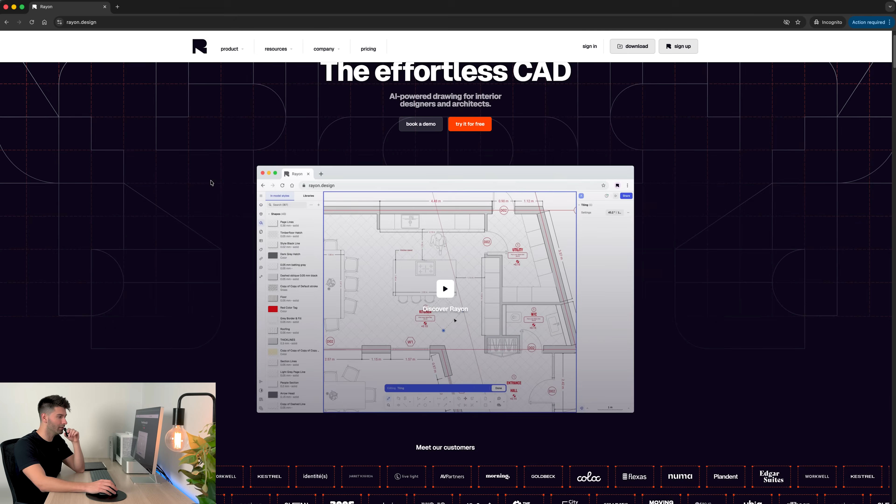Rayon, on the other hand, has been built for interior design from day dot. You can see straight away from their homepage that they're focusing on interior designers, floor plans, furniture layouts, interior graphics, schedules of FF&E, and so much more.

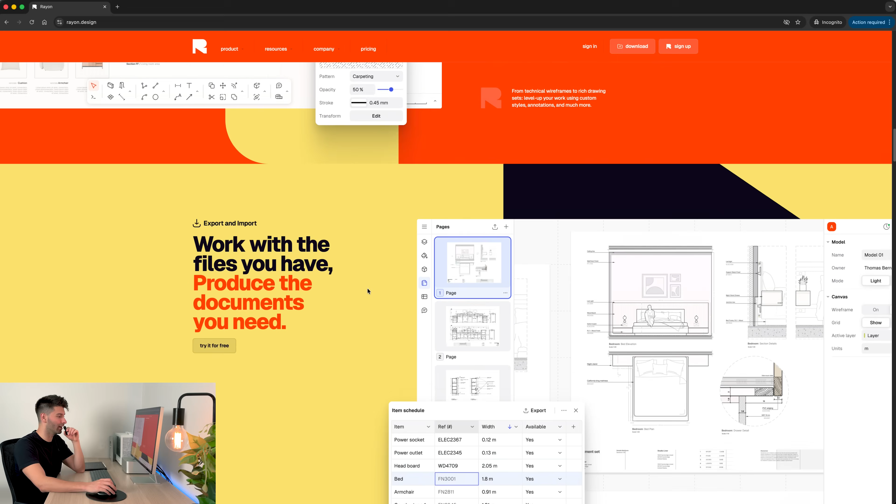If we just scroll through what they have to offer, it's a lot more colorful, vibrant, and more modern in 2026 compared to AutoCAD. We even have style and annotation in here, which I'll get to a little bit later on. Blocks and collaborative involvement. So straight away, it looks like this next generation software that we want to be excited about and learn more about.

And when we go across to pricing, you can see it's completely free. If you need a little bit more power, it's only $21 a month compared to the 200 plus for AutoCAD. So straight away from the two interfaces, we get the feeling that AutoCAD, you're telling the software what to do, how to do it, and drawing technically.

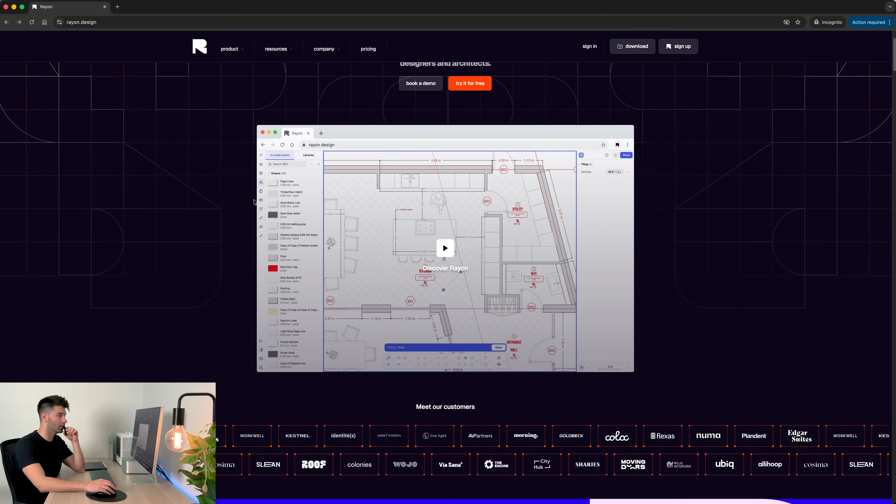Rayon, the software is letting you be creative. It's allowing the space to work for you and with you. Dive into a template and have a look. You can grab a copy of this template down below.

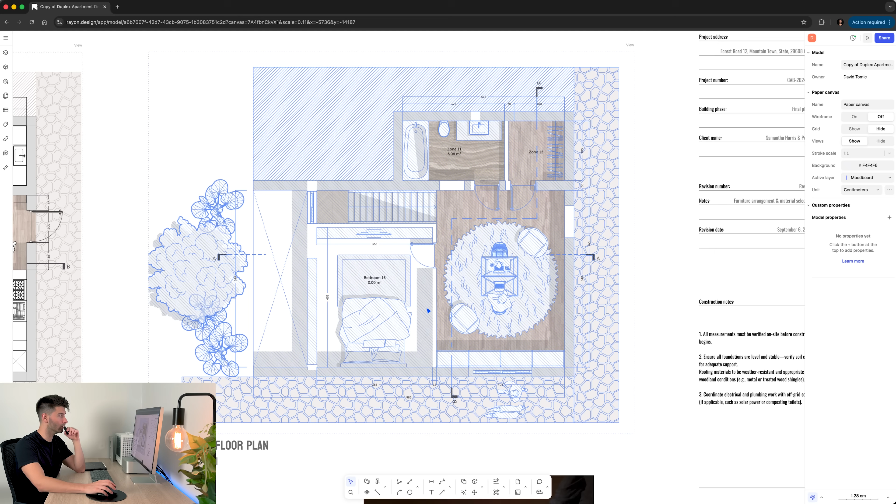This is an interior design for a duplex home renovation. You can see that we've got images, text, drawings, all in the one space. Even these floor plans for our furniture layouts are all done within Rayon. You don't have to take it to Canva or Photoshop or anything in between.

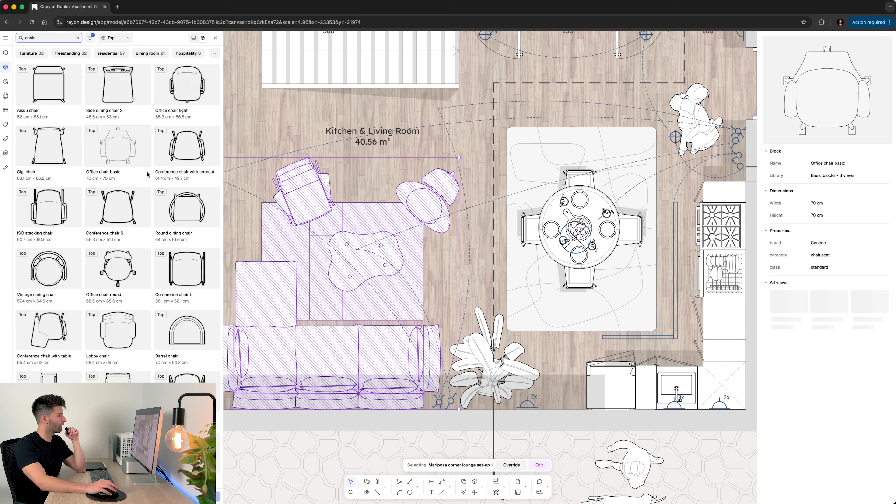In AutoCAD, we'd have a floor plan like this, but we'd be searching for blocks for weeks on end to try to find the perfect one, and we'd probably end up importing DWG anyway. In Rayon, blocks, find—let's just type in chair as an example—and you'll see I've got so many chairs to choose from, and they're full families too.

So if I click on this option, on the right-hand side, we'll have our top, front, and side view all available from that one same chair. If you can't find what you're looking for, you can use the AI panel either on the left-hand side to open the chat, or down the bottom, clicking the toolbar to generate a block from an image you found anywhere on the web.

Here you can see everything's grouped, so if I open up that group, I can adjust it in a matter of seconds—rotate, relocate, and update—and nothing breaks. It all works consistently time and time again. And like I previously said, this is all in Rayon.

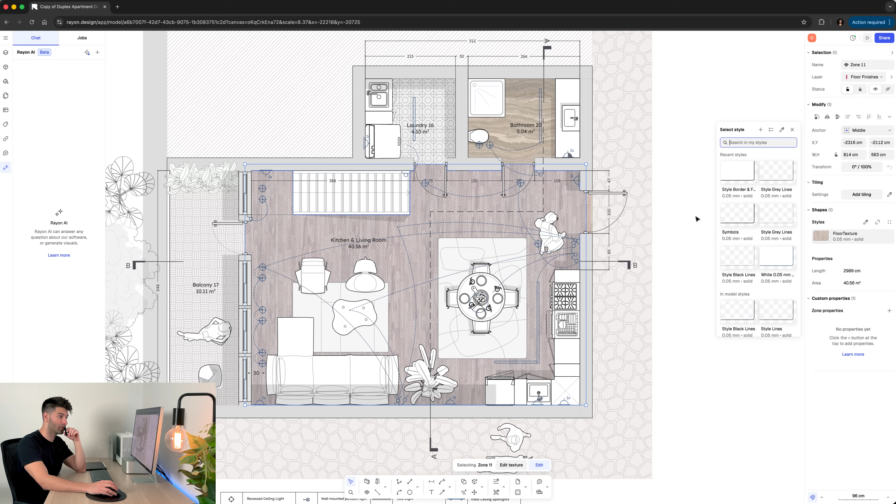So this behind is just a style, meaning it's a hatch that has a pretty picture attached to it. It doesn't slow your project down at all, and it lets you show exactly the design intent. If we wanted to change this, for example, we click on it once, and then we can click on styles and find something we like that's preset. If we don't want a preset, we can make it from scratch by clicking the little edit button.

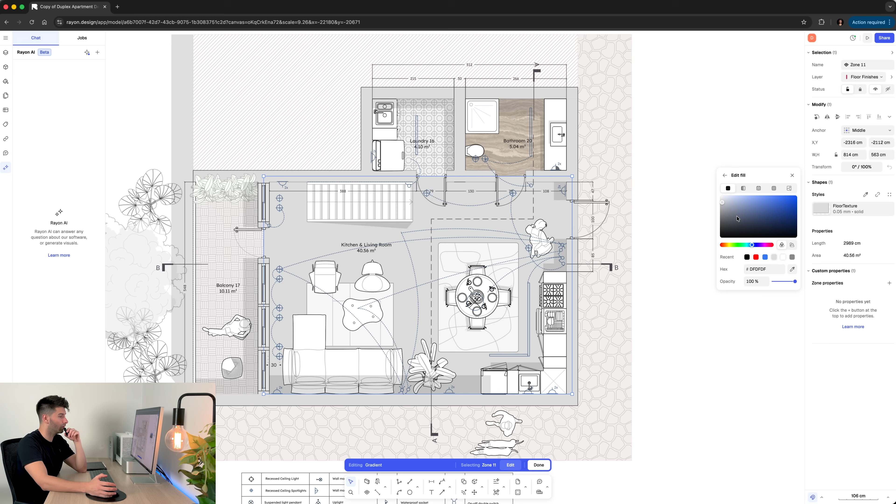Going into our textures, now we might want a hatch of tiles, we might want a custom image we've imported, or a fill that we've found, a gradient, or even just simply a color. All of these are super simple to change and adjust in Rayon. If you made a mistake, like always, Control Z, Command Z, depending on what software you're on, and it will just undo all those errors.

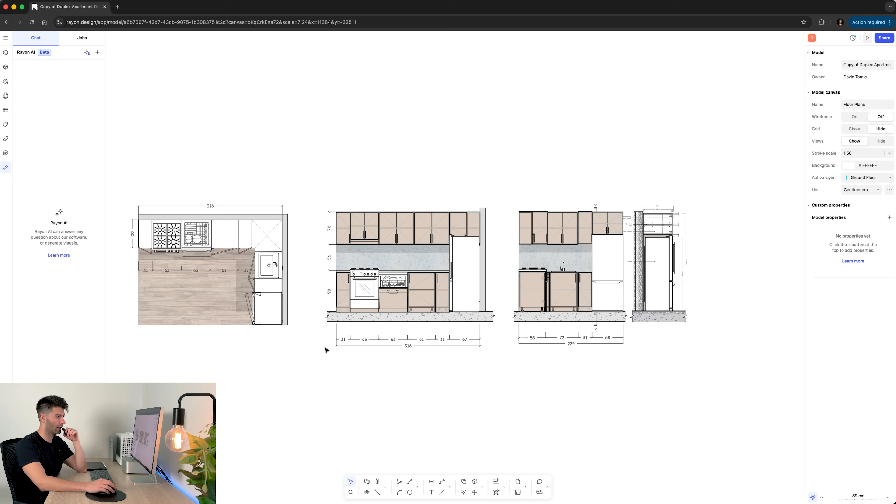Now, here's the best part. In AutoCAD, we dread a client saying, 'I'd like some changes,' especially as you move deep into the project. You've got your sections, you've got internal elevations, you've potentially got some cabinetry layouts, and maybe you're doing some axonometrics of these cabinetry layouts. These things take a lot of time, effort, and energy.

Luckily, in Rayon, it doesn't really break. It doesn't take long to adjust, move, update, resize, rescale, reposition—even changing fills and colors and opacities all at once is relatively simple. Don't get me wrong, Rayon still works in a layer system.

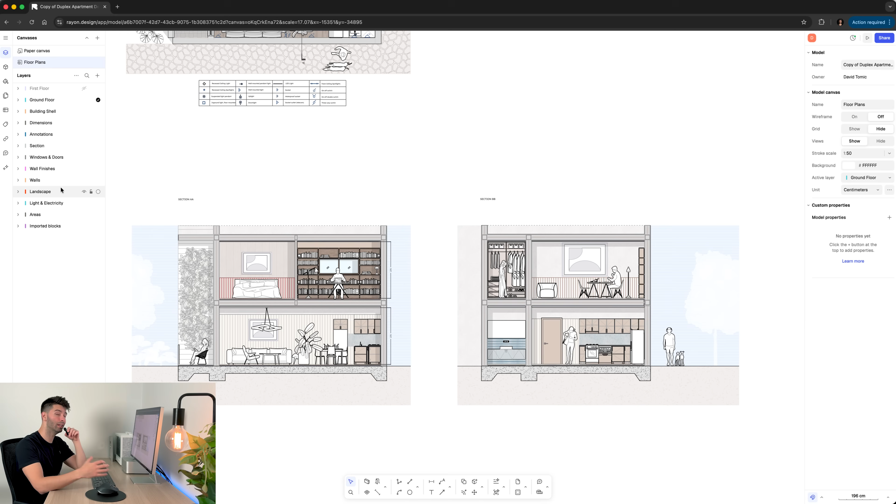So if I come up to the top here, you'll see I have my layers, but it's a ridiculously condensed, simplified version. All we're using our layers for really is grouping, so that if we want to turn off things like our doors and windows, we can come into our ground floor, find doors and windows, and toggle them on and off. Or if we want to toggle our dimensions and annotations on and off, we can do that simply through a layer.

In Rayon, you're not thinking about layers as a stacking priority system, which of course it does work in that way. You're thinking of layers as a grouping method, a way to organize your projects, to be able to relocate, remove, turn on and off layers quickly, but in a much more user-friendly and creative way.

You would need to take this exact floor plan into Photoshop, Canva, or any third-party software, paying for all those subscriptions and fees, as well as the exorbitantly expensive AutoCAD itself, to produce exactly this. Not only does that cost more money, it takes a lot more time to go from one software to another. So instead, we use Rayon.

We document the styles, import the blocks like the hand basin, shower, toilet, laundry, and everything between. We document our electrical plan, room names, and use our automatic zoning tool. Down the bottom, zone - you can just hover over spaces like this entire kitchen, click once, and it gives you the exact zone space.

Let's say you want to do the laundry - just click on it once, click again. Let's delete those tiles so we can see the zone we created, and it's done it instantly. Those zones can be used as fills too. If we wanted a gradient, a hatch, a tile like this, let's transform that, scale it down to 0.2, maybe even better 0.4. There we go - we've got tiles in our bathroom again.

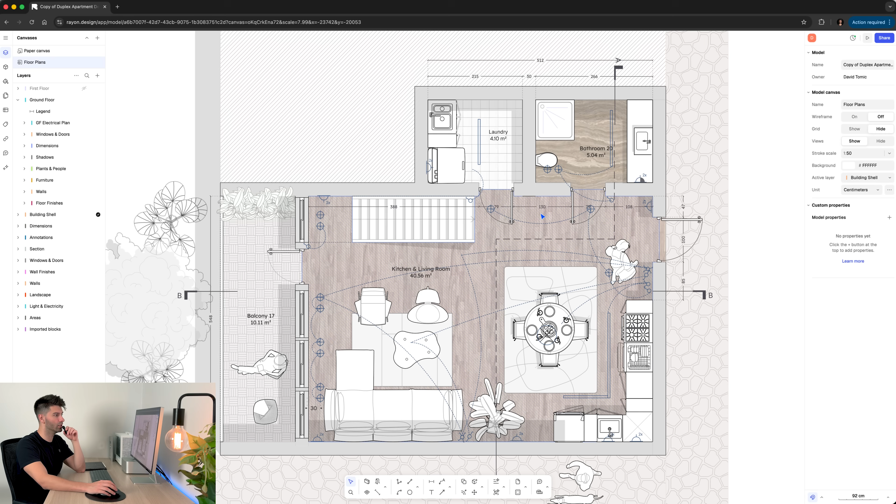That's automatically linked to this zone. Then we just rename the zone to laundry up the top here in the right hand corner, and we retain our square meterage and have our named room done instantly.

Once we've dragged and dropped it into the paper canvas, we've created our beautiful presentation set - floor plans, electrical plans, fixtures and fittings, electrical schedules, a couple sections through the building, an FF&E schedule - dragging in images, creating beautiful schedules, itemizing them with quantities being automatic.

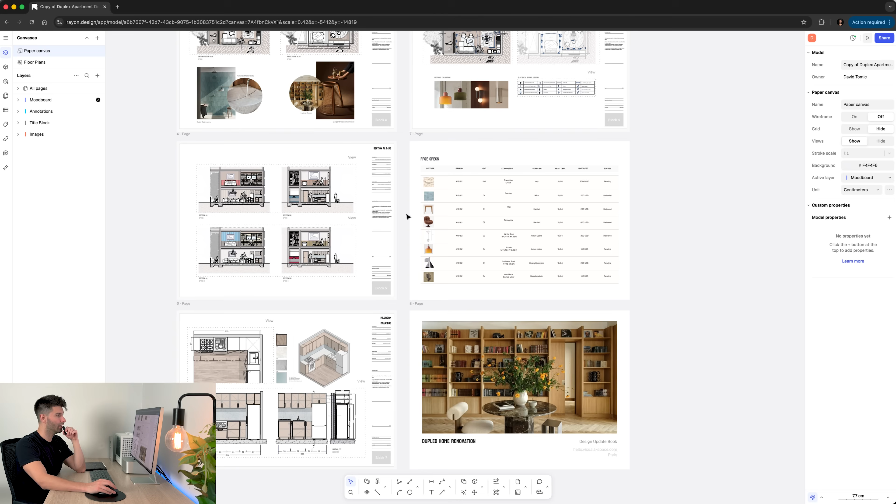Millwork drawings and potentially even photographs, renders, AI generated images, everything in between. Then we can export it as a PDF, amazing.

But more importantly, we can share a live link. So at the top, live, we go to share, presentation, turn on this little toggle. Then we can copy, paste, and see an online portfolio style presentation viewer of each individual page.

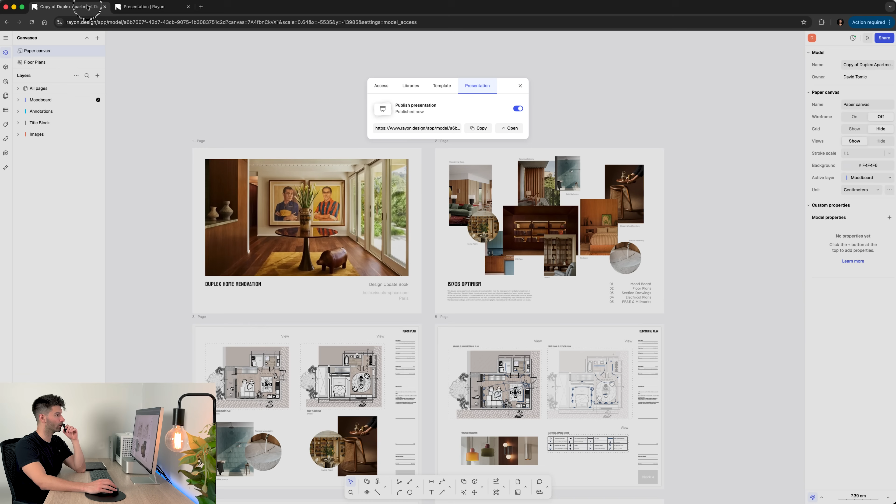Now, this is completely live. So if I went back into here, found the image, deleted it, went back to Rayon and refreshed my page, then came back into my share presentation and just updated the pages, if I come back into the presentation set and reload it, you'll see that image is entirely gone.

This is super helpful. It means you don't have to send continuous PDFs back and forward. You don't have to have egg on your face for making mistakes. You can just quickly fix it before anybody opens it up and really sees what's going on. So if you need to make any last minute critical changes, you just simply do it here in Rayon and update the presentation link so it's ready to go.

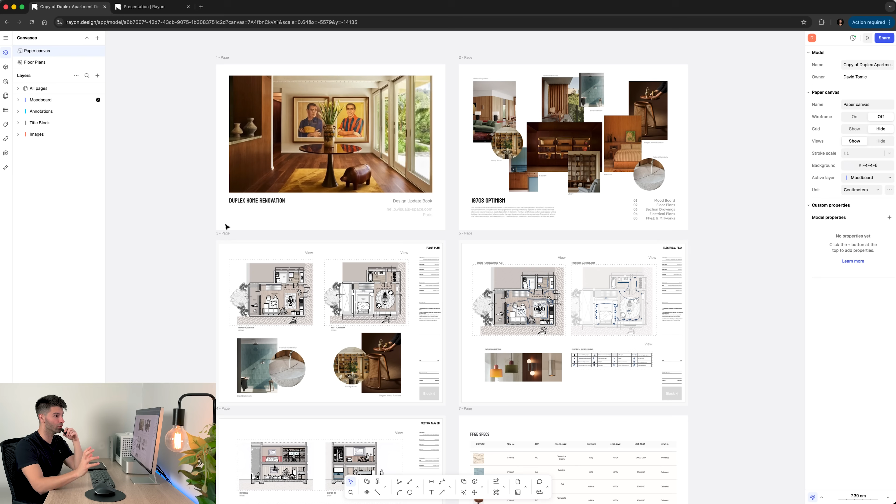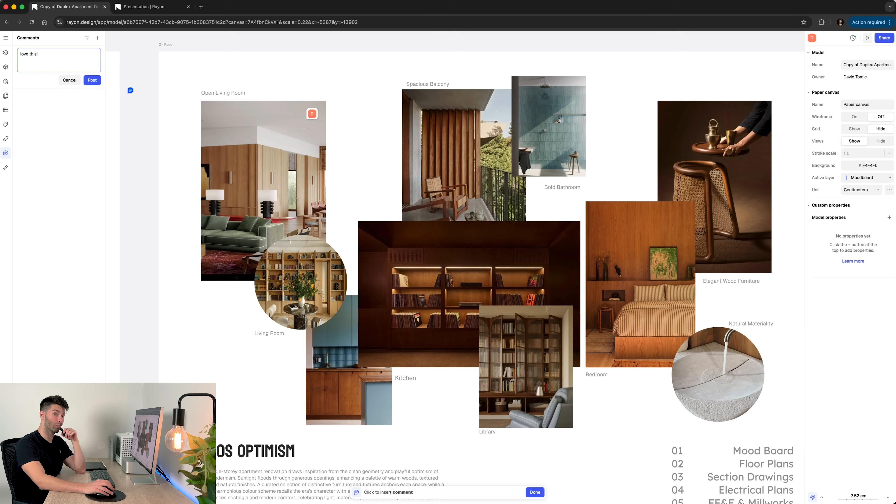Admittedly, AutoCAD and most other traditional 2D CAD software have terrible collaboration methods. It's typically, here's my full set, let's export it as a PDF, let's email it, wait for some comments, and come back. In Rayon, we have live collaboration features, which means we can invite collaborators into our project. They can see everything like we see it now, add chat bubbles directly into the project, provide you with positive or even negative feedback - let's call it constructive criticism.

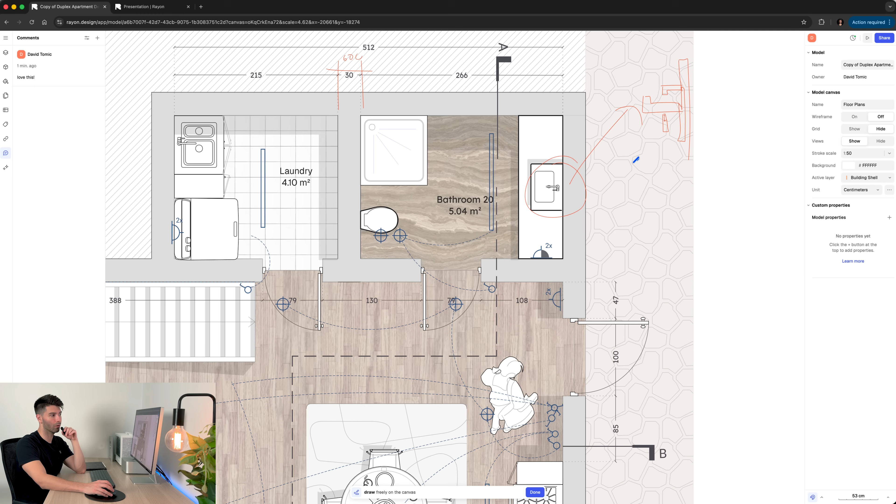If they don't want to use a chat function, they can come down to the bottom and type in draw, open up the draw feature, just scribble over your drawings. That might be useful in this scenario, or it might be able to call out details, draw custom sinks falling down, give people a bit more idea of what our detailing is going to look like. Very crudely drawn, but you get a little bit of an interpretation of what I'm looking for, which you can't really do in a chat bubble. So the annotation feature is incredible to use for a visual field.

This is huge for clients, studios, practices, and basically anybody that we deal with on a daily basis.

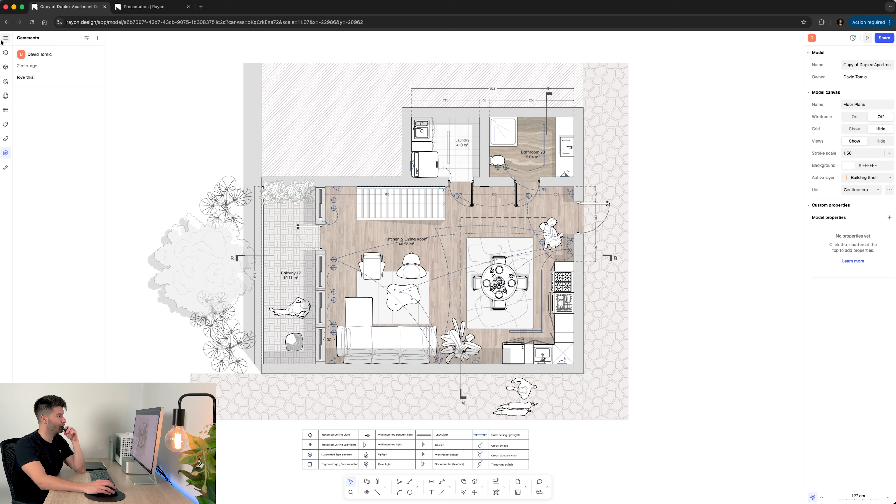Now, before I wrap up, here's one bonus. You're not losing CAD power just because you're moving from AutoCAD, and Rayon doesn't have CAD attached to the end of it. You still have the ability to export images, all your pages, PDFs, all of them, like you've seen in the presentation set, but you can still email it to people if you want. You can export your data, you can even export a Rayon file because Rayon is obviously web-based, but it can be desktop-based if you need it to be. So at the end of the day, your drawings are still accurate, professional, and ready for the real world.